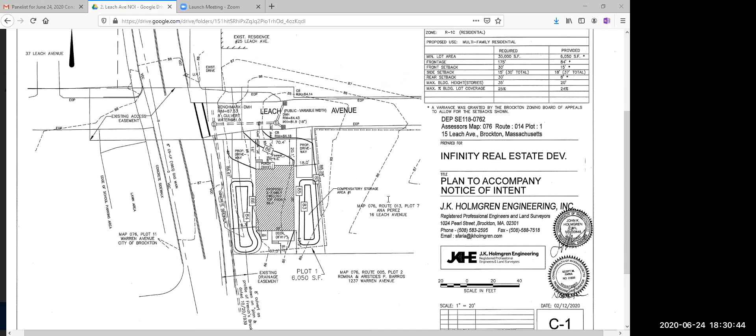Okay, can you see the screen? Yes. All right, because I don't see your name on the abutters identified. It's Perez. Oh, it's Perez. Okay, correct, so you folks are over - I just saw you, you're over here. You're immediately adjacent to him, that's attached to him, and that's his property there that he has.

And my neighbor to the left of me also, his yard turns into a river as well.

Again, Madam Chair, if you look at the plan, their property that abuts us, they have a good sized side yard, a grass area, and they're about 3 feet up grade of us. So that whole end of Leach Ave does flow downhill to the two catch basins in front of our property. Those are at a low spot.

Where is the drain discharging to? Right in front of his property, on both sides, right there where your cursor is, Madam Chair. That's where it drains to - that's the manhole. And then it discharges to French Brook, the culvert. From here is French Brook? Yes, it runs in a southerly direction, north-south.

So it's a big, 8-foot culvert. It's a major drainage structure, not a 12-inch pipe. It's a big structure they put underground to reroute the brook. But if it's surcharging, it sounds like it's not sized properly. The catch basins in front of our site may not be sized properly, but the culvert itself, again, it's an 8-foot culvert, as big as most of your rivers in the city. So I'm sure the culvert is fine. It's the catch basins in front of the site that are 12-inch pipes. There's only so much water they can handle at one point.

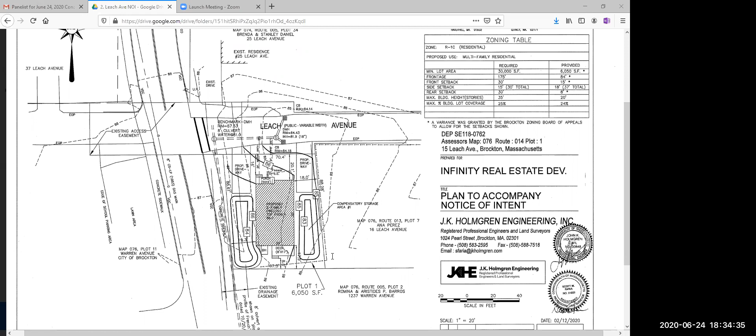So I basically abut the property, I'm not sure, to the rear most likely of the property. I'm not sure of the actual direction of it. The water comes in off of Leach Ave and actually pours in over the rear of my property. The grassy area alone is about 200 feet in length. A week or two ago we had some heavy rain that basically flooded out my entire backyard, a 10,000 square foot area, to give you an idea of how much water goes through there. Usually when it happens in early spring or something, the ground could still be frozen, and that water can stay back there for over a week because it has nowhere to go.

Not only that, but my backyard runs into the other empty lot - the undeveloped lot on the other side - and it runs into there as well. I've been here about 13 years. I remember my neighbor Perez, their entire basement flooded years ago. I don't know if the elevation was changed at all with the foundation being laid in, but I'm pretty sure it didn't improve any of the conditions that already existed.

And again, if any of my fellow commissioners want to speak, just speak up, I can't see you so I don't know if you're dying to ask a question or not. I have a question, this is Bonnie. I am curious more of how it would play out if we were to engage with the idea of no basement or a reduced basement. That sounds like something the city engineer was recommending. Yes, that was his recommendation. Again, this was related more to the integrity of the house rather than the easement.

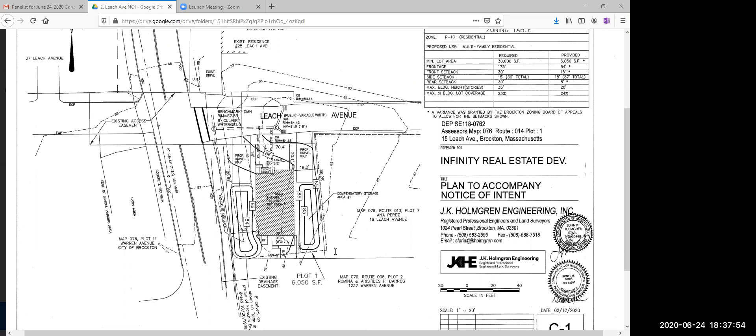I mean, are you raising the elevations overall? Yeah, we're pretty much keeping it - we've got top of foundation at 89, grade around the foundation at 86, and the existing grade on the lot is between 85 and 86 depending on where you are. So the proposed grading is pretty much the existing grading, not a great change. So what is the fill being brought in for? And I still need an answer to my question about the depth to groundwater. The fill is just being brought in to mound around the foundation, so we can properly pitch away from it. That's it, it's just 100 cubic yards, not a giant amount - it's really just to properly grade away from the foundation.

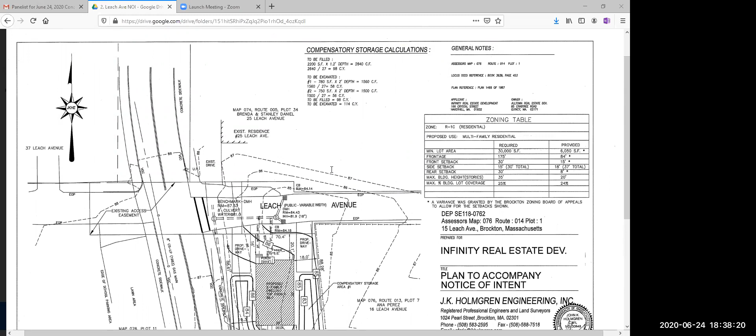As far as groundwater, we didn't do a test pit to look at it. We don't typically. The top of foundation is at 89, which would put your basement at 81.5. The lowest spot on the lot is about 85. I'm sure we don't have a groundwater issue out there, but we could certainly dig a hole to prove that. As far as not having a basement on the property, I don't know that there's really a reason to justify that. It's not in the floodplain and it's not in the groundwater.

But we don't know what the groundwater is. To be honest, if I went out there tomorrow and dug a hole and found that the groundwater was at 83, we would just bump the foundation up, look to raise it somehow that way. As far as the city engineer is concerned about the bottom of the basin being at 83 and the basement being at 82, we could just put a poly barrier up against the foundation to make sure the water didn't go into the basement, if that was an issue.

Okay, so if I heard Megan correctly, the city engineer would like some time to evaluate the compensatory storage that's being proposed. So I can read his recommendation here on behalf of the engineering department. It says, 'It is our recommendation that the Conservation Commission should suggest to the project proponent to request an extension so the above issues are first addressed and reviewed by the Division of Engineering of the Department of Public Works.'

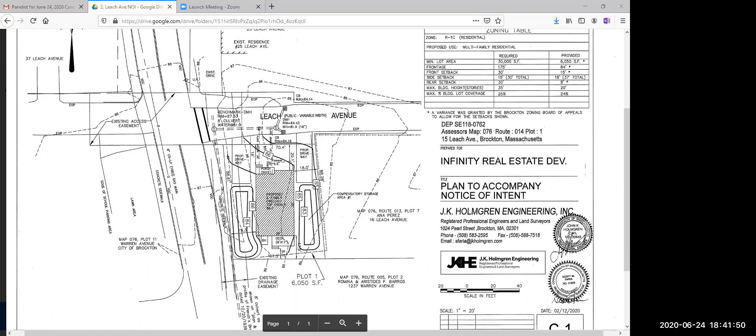So do you want to continue? Yes, please. If I could see the city engineer's letter, we'll do our best. It's not easy. We've been waiting for a response for a few weeks on this one. Unfortunately, if it just got there today, that doesn't help us much. But if we can get a continuance, we'll do our best to get some conversation going with the city engineer and come up with a solution that satisfies everybody. It just isn't easy doing it. And our next meeting is the 15th.

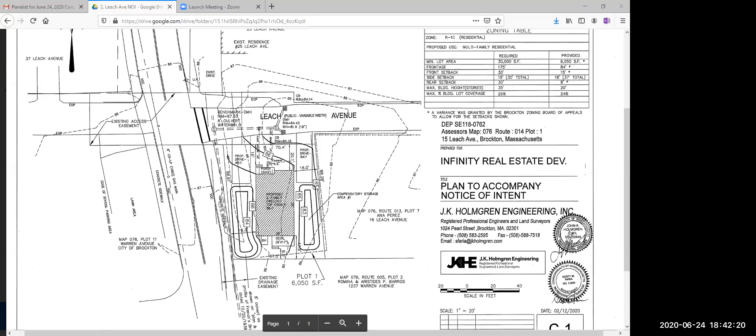So do I have a motion to continue to July 15th? I make a motion to continue to July 15th. That's Joanne. Do I have a second? I second. Bonnie? Danielson, aye. Joanne, aye. Bonnie? Aye. Okay, so we'll see you back on July 15th. Thank you, folks, have a good night.

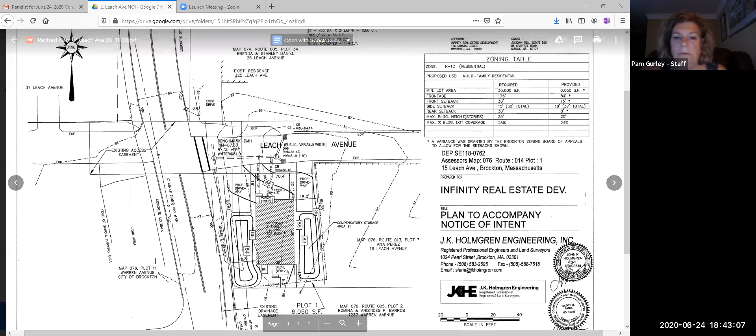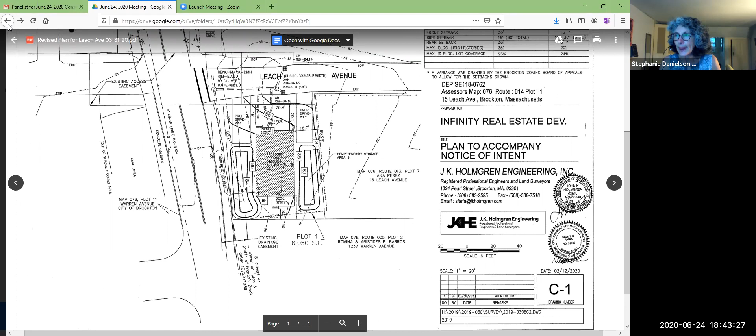Pam, can you hear me? We can. Okay, thank you.

And is this the project that's identified as Zero Quincy Street? Yes. I was planning on recusing myself from this project. Madam Chair, this is Antonio, yes, the project engineer for this project.

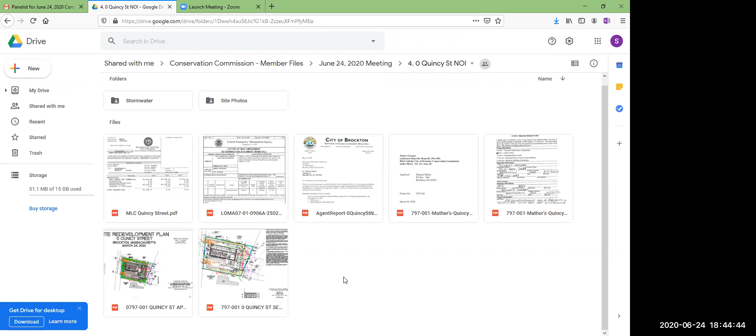I believe, Madam Chair, that you only have three members of your commission present. That's correct. And I also therefore believe under the open meeting law and notice of disclosure, I believe that you are allowed, Madam Chair, under the rule of necessity to be present. You may not necessarily vote on it, but when you are participating under the rule of necessity, it's important for us to have a quorum. I have what could be perceived as a conflict, and I was going to ask you, again, in the interest of quorum and not continuing this, because we've already waited quite a while to get to this meeting.

I will make a disclosure. I was notified by my manager at work that there may be a work-related conflict for me, but personally, I think I can act in a very objective manner.

And if it's just to keep the quorum for tonight, then at the next meeting, if we have a full board, I may recuse myself at that point.

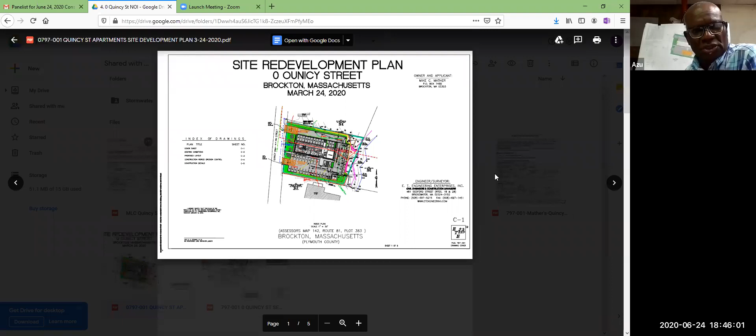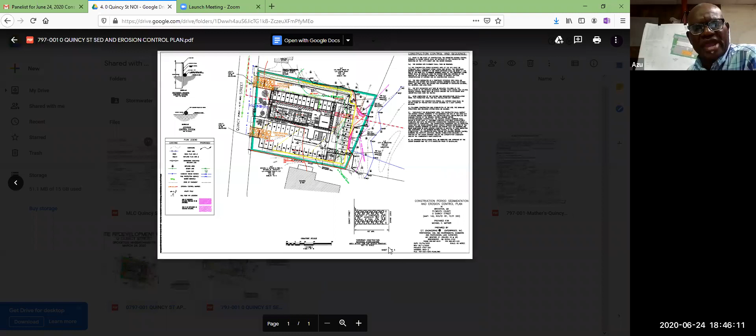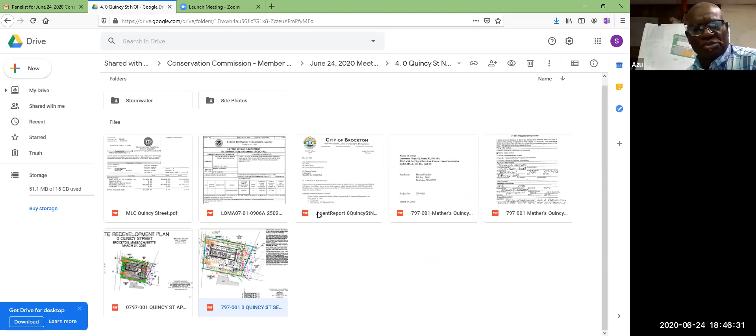Madam Chair, I think I've worked with your commission for a very long time, and I believe I'm not speaking out of turn if I say that you're very fair and knowledgeable in what we are doing. We believe you will be impartial and give us a fair hearing and a fair action if we're able to convince the commission that we have done our due diligence. So we will not have any problem with your participation, Madam Chair.

Okay. As counsel for the applicant, I would agree with you. Okay, let's proceed.

Good evening. For the record, my name is Azrael Taniru. I've put up a board behind me to hide the clutter in my office, but I'll also use it for discussion purposes. I'm an engineer, but not too savvy with computers and sharing files, so I'll use the plan you have, as well as my background poster, for additional conversation. This project is located near the intersection of

Quincy Street and Crescent Street, being Route 27. It is across the street from Massasoit Community College, which I believe is the former Christos restaurant site.

What we have here before you is a classic redevelopment project. In other words, the property was previously developed. It is approximately 85% currently a parking lot with bituminous concrete pavement as its surface.

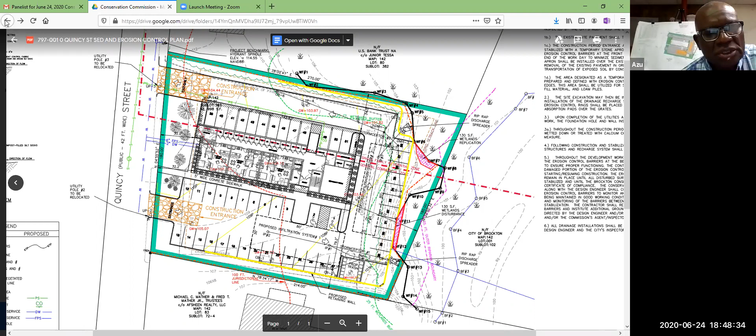Mr. Kenneth Thompson, our consulting wetlands biologist, delineated the resources, which include a riverfront. In Brockton, the riverfront area is 25 feet from the mean annual high water, and also a BVW, bordering vegetated wetlands, which pretty much tracks the edge of the existing pavement.

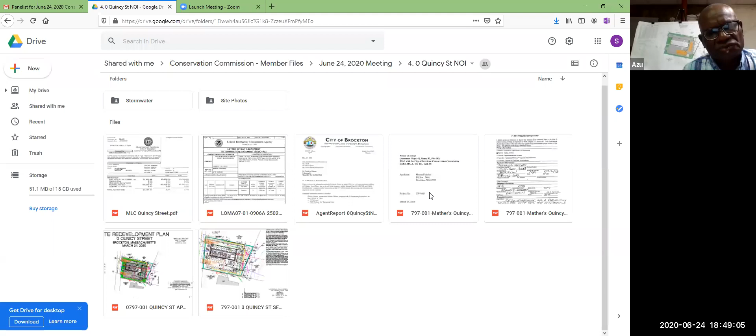What we have before you is a redevelopment project for assisted/elderly housing use, which means taking away a good portion of the impervious bituminous concrete surface and replacing that with a building, which reduces the potential for contaminants.

We've also performed, even though it's a redevelopment project, stormwater analysis, evaluating the pre-development and post-development conditions, which in reality is a wash.

However, being good stewards and aware of your environmental concerns, we are providing treatment for the impervious area, including the roof drain runoff. We are providing on-site recharge based on the DEP stormwater guidelines.

The site is flagged, designated as a floodplain. We did our calculations and have an actual elevation established for this site. FEMA, after evaluating our calculations, accepted the flood elevation that we've come up with.

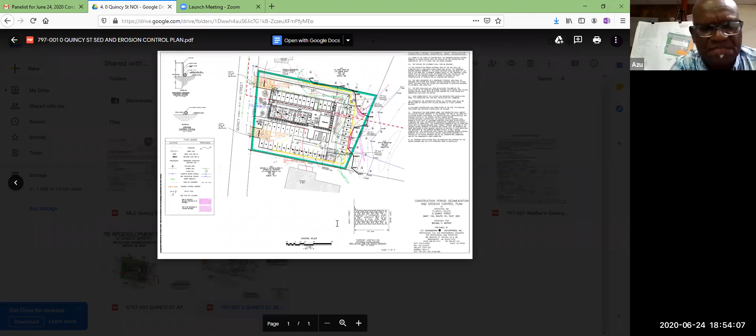Whereas the area of development is actually a redevelopment under the DEP stormwater guidelines, standard 7 is really what is applicable here. That standard basically says that for redevelopment, especially in-kind redevelopment, where we're taking an impervious asphalt area that we're going to be treating, we can, as long as to the maximum extent practical or feasible, that's the level of compliance that we need to achieve.

However, trying to be good neighbors and good stewards, we are reducing the rate of runoff. I will go quickly in a minute through the comments from Ms. Shave, as well as the comments from your review consultants, Beta Group.

I will say this: the original delineation of the BVW was done in 2018. It's taken this while to come up with a development plan that will work for the site, as well as meet our client's objectives.

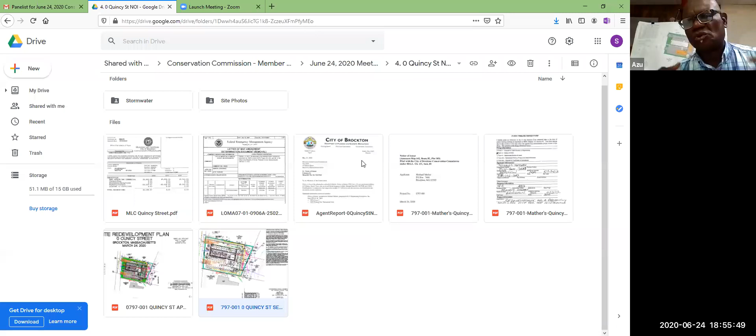In reviewing the comment from Ms. Shave, we have gone out, because the wetland delineation was done based on the criteria established by DEP. What we have done then, because we collected those flags, the delineation flags, by survey on the ground, I'm the licensed surveyor responsible for that.

We have since, receiving the comments from Ms. Shave, reestablished the flag locations. So those flag locations are there on the property.

To the north, along the northerly boundary of the project area, Madam Chair, members of the commission, we have almost like a finger-like projection of the BVW, and most of that BVW then traverses in a northeasterly direction on the abutting property. So we didn't feel it was proper for us to continue beyond our immediate area into somebody else's property without their permission.

One of the items important for us: we understand you have a policy of requiring a 25-foot no-touch boundary from BVW. Because this site is previously developed, we are not able to achieve that setback.

Also, in order to make our drainage work properly, we have approximately 130 square feet of BVW alteration to allow for a positive discharge, actually in consideration also of the comments from your peer review consultant, Beta Group. We have actually realigned the discharge so that we have proper positive discharge and have updated our calculations.

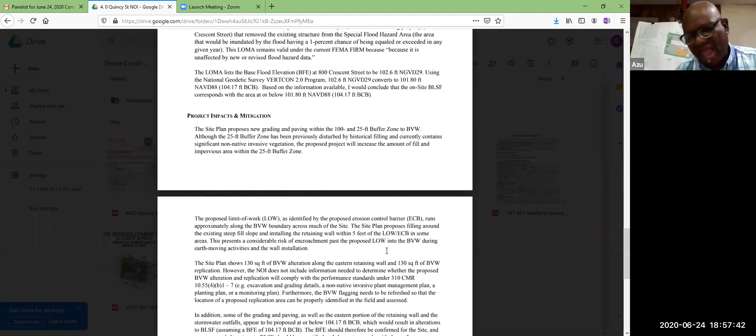We will share that with them and Ms. Shave. So we would welcome, at the earliest possible convenience, Ms. Shave's revisit of the site to review the delineation, because if she has any problems with the delineation, it might affect what we're doing.

So we would like that to be resolved with our biologist if there are any issues, because there are specific areas Ms. Shave identified that she questioned. So we would like an opportunity for that to be reviewed and addressed.

Again, we are providing treatment, and I have a written set of responses that I will share with the commission and their consultant. At this point in time, that was a week ago, that the review report we received from Beta is dated June 15th, so exactly a week ago.

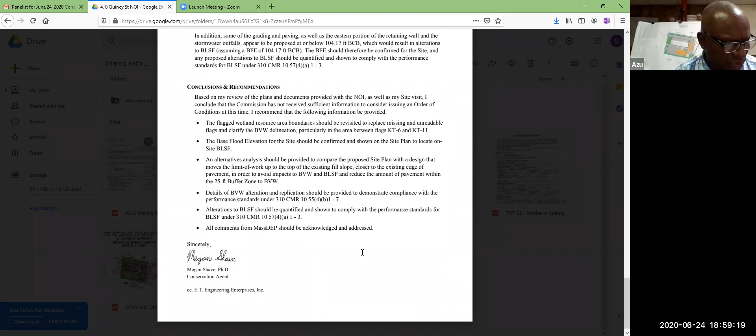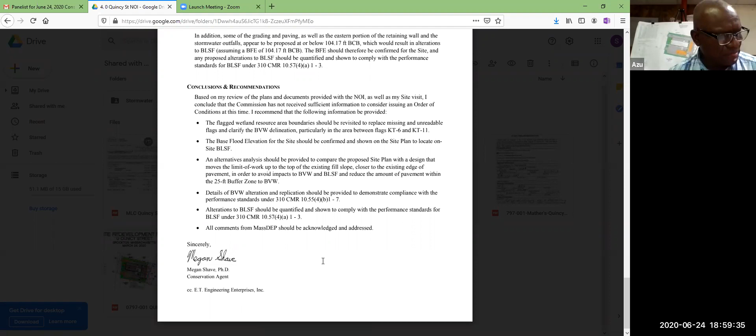And obviously they did a detailed review, as well as Ms. Shave's review. I have articulated some responses, and in the interest of managing my time and perhaps the commission's time, whereas Ms. Shave will need to go and look at the flagging we've hung up, and whereas we believe some of the comments, we would like to discuss that with your peer review consultant so that we are not going back and forth, so that they can understand the rationale for what we've done.

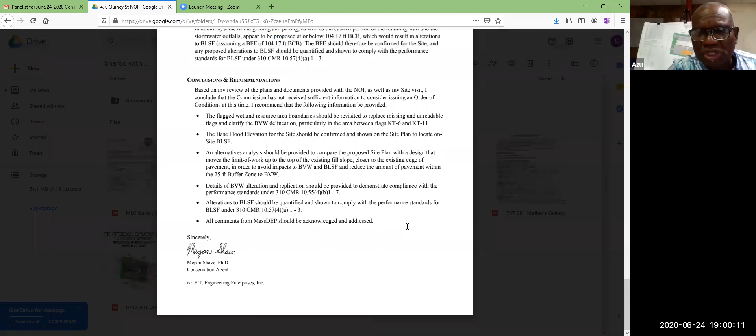Again, I think we are 99% in line with the DEP regulations, but I guess we need to make sure that we convince your consultants on that. I have my review of responses that I would like to email to you as well as your consultant, and then have an opportunity to discuss it with them, perhaps virtually, and then meet with Ms. Shave on site, and then we can have a productive meeting and hopefully get a positive conclusion with the commission. With that in mind, I would entertain any comments or questions at this time, Madam Chair. Thank you.

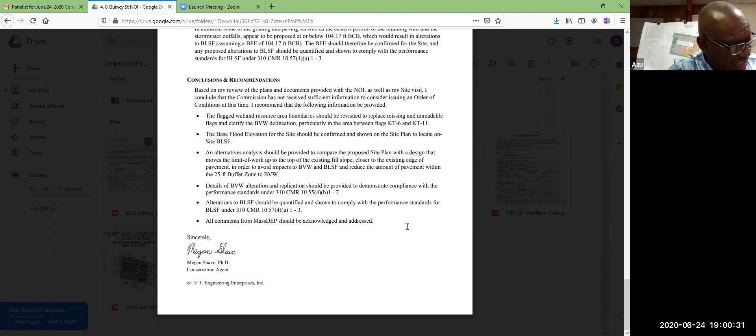Megan, you have a few comments in your letter. Do you want to review those, please? Sure. So Azu has touched on some of them, so I can just reiterate and run through them.

Yes, I did recommend that the wetlands flags be revisited. They were hung in December of 2017. So while technically that falls within the 3-year period of validity, when I went out there, I did find that a few flags were missing and most of the flags were no longer readable, which made it a bit difficult for me to determine the delineation in some places. Particularly between flags 6 and 11, I had some questions about the shape of the fill slope and how that influences the surrounding BVW. But at the time, it was hard to determine because flags were missing. So that is something I can follow up on now that the flags have been reintroduced.

I also had a comment about the base flood elevation. This is another Zone A area for Beaver Brook. At the time that this was filed, there wasn't a base flood elevation provided. It sounds like Azu has since pursued a letter of map amendment with a base flood elevation. So receiving that, we should be able to review that and see how it falls on the site based on what they're proposing.

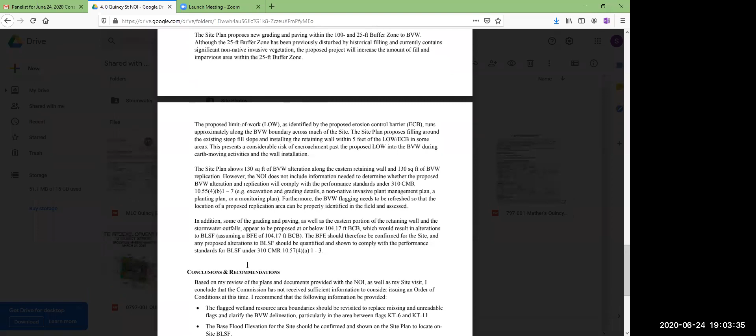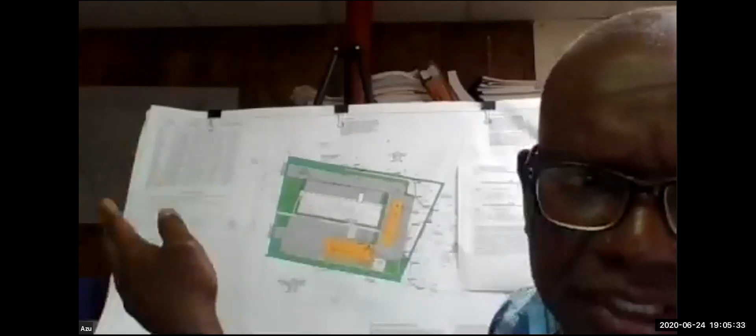I would respond by saying those are actually reasoned and fair comments and questions. And I believe that, yes, unfortunately, what happens a lot of times with these projects is that as they evolve, you end up seeing what we've come up with. But I will submit to the commission that we did go to the Board of Appeals. So this is a compromise of a project that what we were looking for was reduced by more than 25% in order to get the variance that we were looking for.

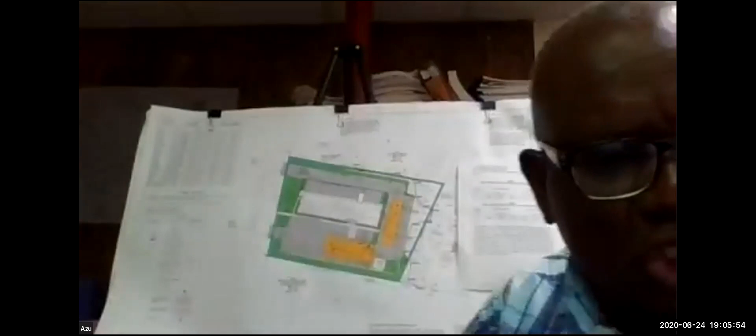So before you go on, is that 25% of the area you're building, or 25% of the number of units? Well, the number of units, because when you think about that, it also reduces our parking requirement more than you ordinarily would have. And they were not inclined to give a variance for parking, because that would mean parking on the street, which is not allowed. So yes, in terms of the number of units.

What I believe, Madam Chair and members of the commission, is yes and yes. You've got situations that are comparable. However, what we've done, if you look at the easterly end of our project, water flows downhill. So that recharge area, keep in mind that presently you've got runoff from a parking area that is untreated and not recharged, and that will continue without this project. So what we are doing here is being good and sensitive to the concerns historically, having worked in this city a long time, trying to strike a balance between those concerns, in an attempt to demonstrate that we have not just come up with a cavalier project.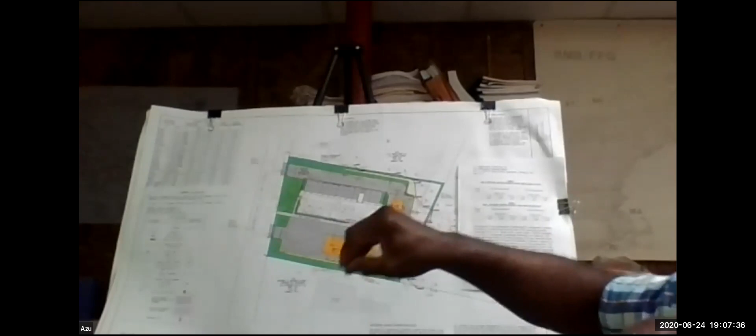Because water runoff does not flow uphill, the site slopes from Quincy Street towards the wetlands. So what we've done in order to provide stormwater recharge and treatment, if you look at where it says proposed infiltration on the east side, I have to do that grading work, so that is some sort of a trade-off. In order to provide that recharge, I have to work within that buffer zone. So I believe it is a fair compromise, that we are actually trying to reduce the untreated runoff from going directly into the BVW, as well as providing recharge to the groundwater.

This will not be your typical single family residential project. This will be a very managed project all along that easterly boundary to make sure there's no activity going beyond that. We're proposing a retaining structure, and we can perhaps do a few more plantings to provide additional vegetation along that boundary. But if you look at the property to the south, to the north, and to the west, we are providing a lot of new green area that does not exist presently.

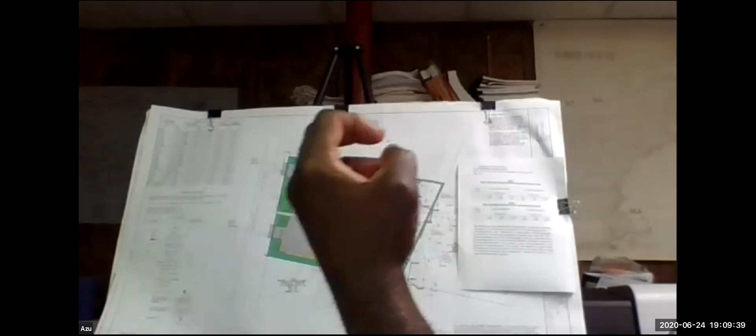So while I'm an engineer representing the interests of my client, we have actually done our due diligence in anticipating potential concerns and issues and being proactive in addressing those. Of course, there are a couple of comments from your peer review consultants as well as Ms. Shave. I believe we have addressed them, but we need to meet with Ms. Shave on the property to make sure she's in agreement with the wetlands line, and then hopefully we will be able to wrap up the project at your next hearing.

If Mr. Mather is online, you can chime in. I believe you've got our commitment to start off because of scheduling, and with all the delays, through no particular person's fault, we would like to meet his construction schedule. This was supposed to go to construction end of May, but we are where we are, and Mr. Mather is hoping to start construction now so that he can still keep the financing he has for the project. So we are looking to start construction end of July.

Has this received site plan approval? I don't believe this has gone through that yet. We've had one meeting with the design review people, and we will meet with them again. So the conservation process is the most critical at this point for what we're doing, and we want to make sure we've achieved that.

You cannot proceed to the planning board without that order of conditions. That is correct, that's why we're here. But I honestly don't remember it going through tech review, so I'll have to go back — I know we had a meeting with the applicants and the attorney, but I don't remember it going through tech review. I'll check the records.

You folks can work that out. If I can jump in here, this has been looked at by the planning department, also on the executive side of the city of Brockton. And I think there's a lot of favor for this project, especially since it's a fairly unsightly location, or a site that needs to be improved upon.

And the city councilors are very in favor of this. And it went through the zoning board of appeals process. We've done quite a bit of vetting with various departments, including the executive branch. And there are many people in favor of this project. Pam, I tend to agree with you.

I'm a little not too sure. I don't think we've done the site plan approval process. I don't think so. We may have filed, and this COVID thing has got me in a COVID coma, quite frankly. I can check tomorrow morning when I'm in the office. I've missed what's happened in the past few months. So if we could, you folks can work that out.

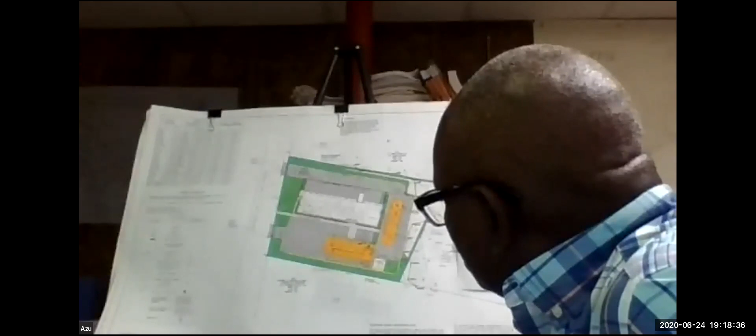The trash removal area, yes. The top right of where you're pointing, that is abutting the 25-foot line. Well, that is 33 feet from the BVW.

Right, but it's very close, and that's my concern. Yeah, it is close. But I just want to make sure that at least we know it's not in the 25 feet.

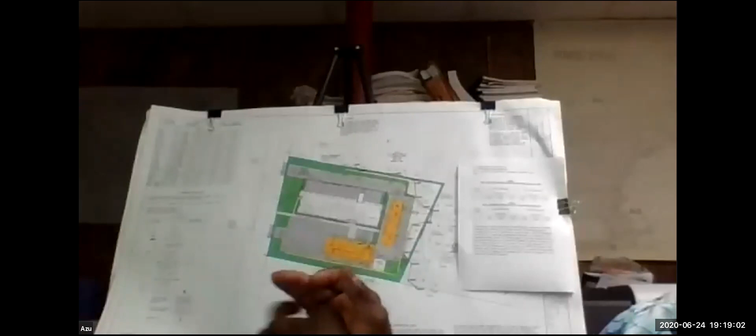It's definitely not. In terms of snow removal, because this will have actual management by a company, most of the snow will be on the green area on the west side of the property. Any excess snow will be hauled off site, since you need to do that to provide the parking. So snow management will not be a problem.

As a matter of fact, it's good practice not to use salt in these areas, and we will not have any problem. We will not be adverse to the commission imposing a condition in perpetuity of no salt for de-icing. That's not something we would be adverse to.

Okay. Bonnie? I believe Joanne has asked all my questions. Okay.

So there's still a lot of work to do. Yes, Madam Chair, we're not looking to close the hearing tonight. Do you want to continue to the 15th? Of July, please.

And in the meantime, we would reach out to Ms. Shave to see when she might be able to meet on site. And Ms. Shave, we do maintain our social distancing, and we do have our masks on every time we go out.

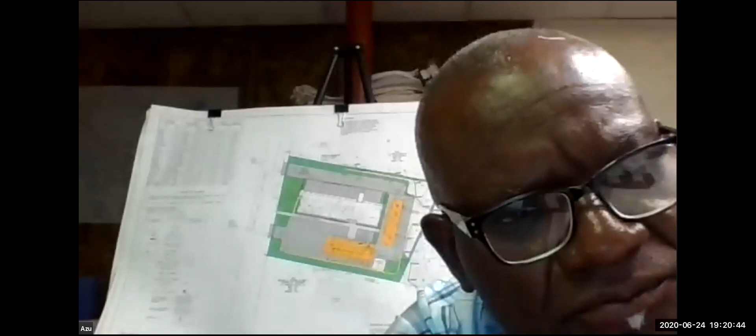I just have one question, more of a comment. Again, Attorney McCluskey was talking about having conversations with the councilors and with the executive level of the city. I would also encourage people looking at projects like this to reach out to Megan ahead of time and have a conversation with her and review the project, because she can certainly help guide you in a direction that will make it easier and facilitate the review process with the Conservation Commission.

I've loomed over Megan's desk a couple of times on this. Okay, already. All right, that's what I like to hear. I like to know that people are reaching out and talking. She is, unfortunately, too close to the front line and has no escape.

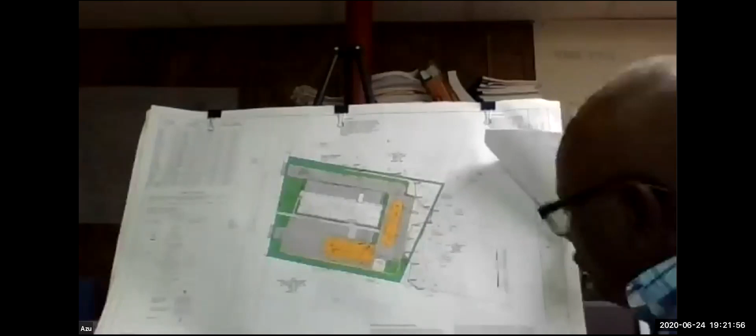Yeah, okay, and then just one other comment. I couldn't find it before and I still can't find it. I'm looking at sheet 4. Is there a north arrow on your plan, Azu? Yes, if you look at sheet number 3. Okay, but sheet number 4 does not have one. Okay.

I don't have my sheet 4 in front of me. Can you share that? Are you able to share sheet number 4? Hold on. Okay.

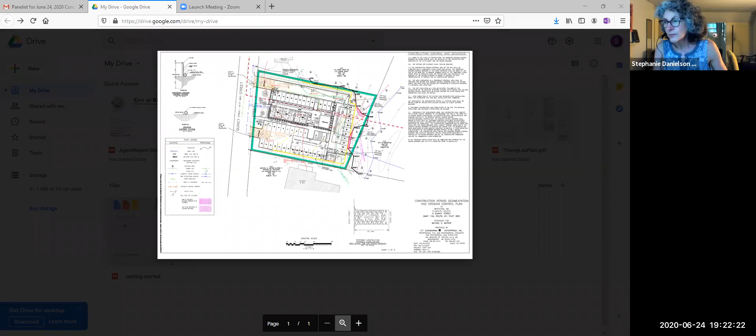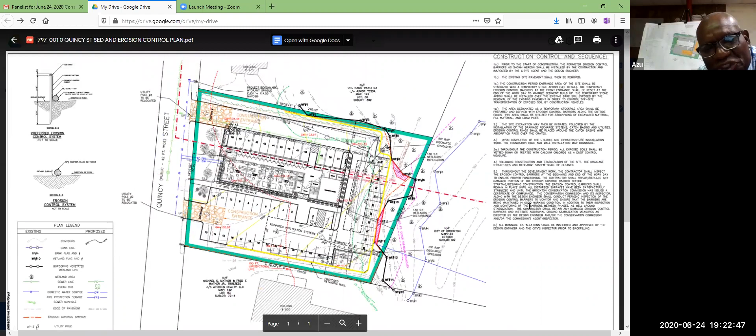Now, the reason it doesn't have it, we can add that, but the reason it had it before—if you look at sheet number 4, it's actually a reproduction of sheet number 3, with all the specifications for the construction period. It took the space where we had it, and we could have moved it over to the left side, but we didn't move it or put it back on the plan. Those notes go there—that's really what happened.

All right, okay, so do I have a motion to continue to July 15th? I'll make a motion to continue to July 15th. That's Joanne. Do I have a second? I will second. All in favor: Stephanie, I. Joanne, I. Bonnie, I. Okay, thank you.

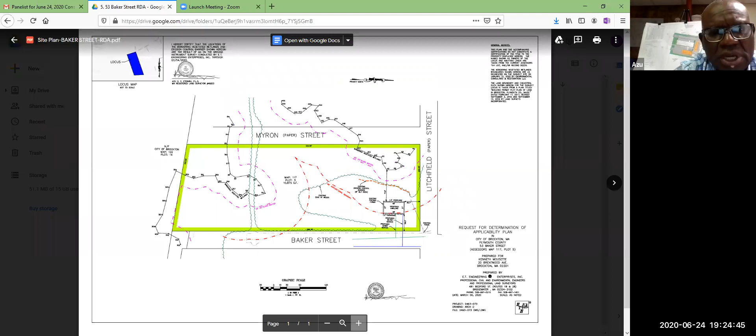There was a confusion as to what Mr. Mousette should have done, but I don't know, to be honest, the history of Mr. Mousette with the commission. However, he did receive an enforcement order, a cease and desist order, telling him he shouldn't do any more work because he has wetlands on the property. The BVW was never delineated.

He apologized and assured me that he had received a building permit and that there was a sign off from the commission's office on the building permit. At that time he didn't know he had to go to conservation. When he received the cease and desist order, that was probably in order because commission staff can only react to a plan before it, and if that plan did not show any BVW, it's incumbent upon the applicant to reflect that. That was not reflected on any documents that were signed off.

So he stopped work. That was back in late January, early February. He hired Mr. Brad Holmes to go flag the wetlands, which he did, and provided a report. Then I went out there with a couple of people from my office and located the wetlands. The foundation is already started—he put the footing on, the foundation is there. The foundation wall was ready to be poured when he got the stop work order, which I encouraged and admonished him to honor, and he has done that.

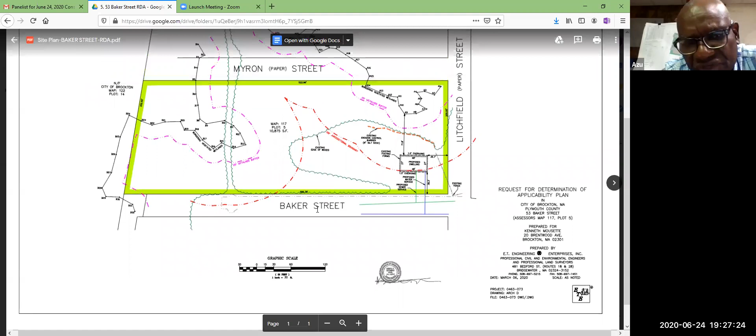With the advent of COVID-19, I told him, let's file a request for determination, which is what we have here, now that he has the wetlands delineated. We are asking the commission, and hoping and praying, that he can maintain that 25-foot no touch. You can see the clearing that's done, this squiggly line representing the limit of clearing, is still above the 25-foot no touch. The actual foundation work is well above 70 feet from the BVW.

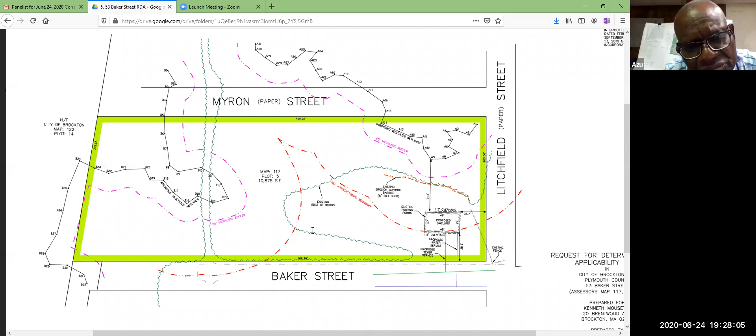I received Megan's comments, and those are properly founded. The problem now, with the negative determination, is the stipulation about not even providing erosion control. Let me back up, Madam Chair—when he was ordered to stop work, he went on and put erosion control barrier right away.

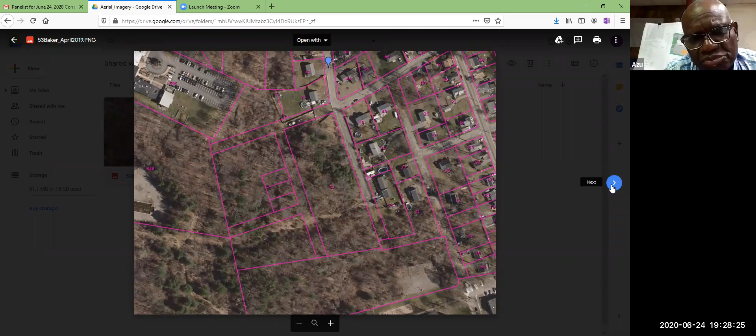I saw the comments from Megan, and those are properly founded, but I also recognize that it's now almost 4 months, and requiring an additional application to go through a notice of intent will really put an undue burden on Mr. Mousette. At least since my involvement, he has determined and committed to whatever needs to happen that he will do. So while I agree with Megan's comments, I think because of the delays we've had—if we'd been able to have a meeting back in March or April, we'd have probably had a hearing on the notice of intent in May. But here we are at the end of June.

So Azu, I'm going to stop you there. The whole world has stopped, and there's been significant adverse impact on a lot of people as a result of COVID-19. We are in the situation we are in, as you pointed out, through no fault of any of ours, and I think belaboring that is not productive.

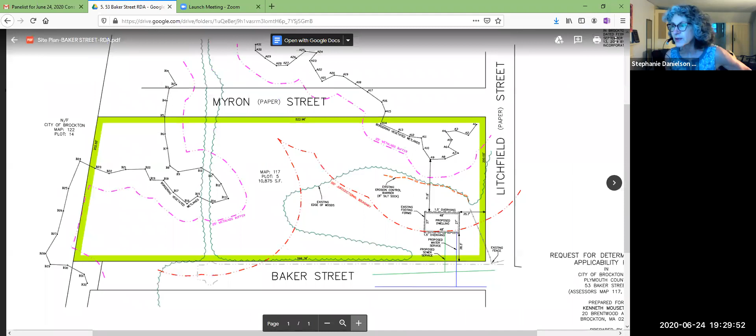I'm looking at the plans, and I see one plan sheet. Am I missing something? No, Madam Chair, you're not missing anything. I don't really see where—okay, so the footing, okay, there it is. And Megan references something from 2002 in her report.

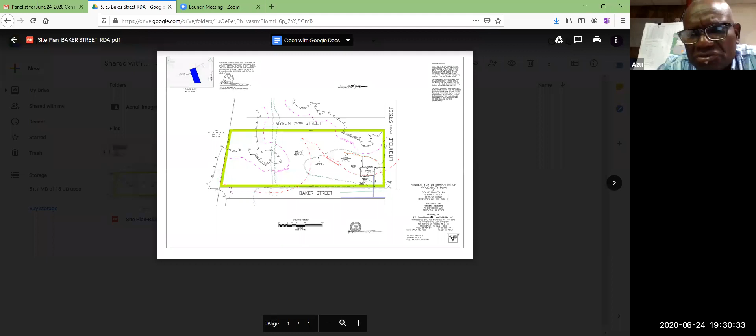It has a long history, right. I'm not sure why Mr. Mousette did not know he was subject, or could be subject, to a filing with the Conservation Commission. Sometimes it's—as I noted earlier, Madam Chair, I cannot speak to the counsel he got from somebody else prior to my involvement. But again, there's been some history here, so I'm confused as to why this is being submitted as a determination when the proposed dwelling is clearly within the 100-foot buffer.

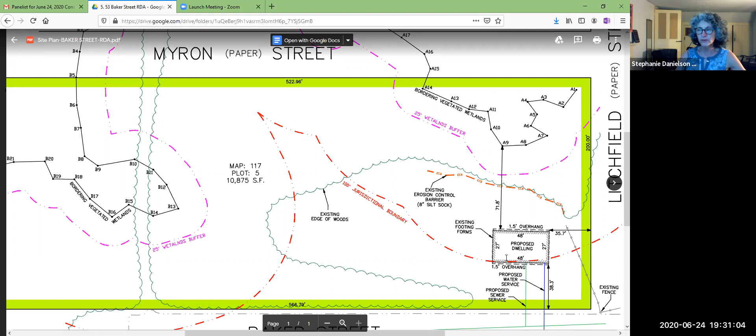The only reason I did that, Madam Chair, is looking at the DEP policy that when work is more than 50 feet, our request for determination can be considered on that basis—that's the only reason. And I'm looking at the foundation that it's 70-something feet away.

That's the only reason, no other technical reason, other than the fact that DEP policy allows a request for determination for when you can stay 50 feet. I think that can readily be accomplished here.

I agree with Megan's comments that perhaps, as a good faith gesture, if we can be allowed to not do any other site work, but at least frame the building. We're still going to do utilities, we still have to do landscaping work, and the foundation is already there.

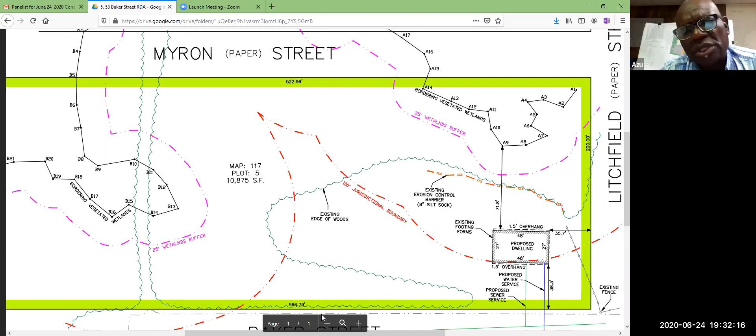We don't have to do any ground disturbance to build above. If we can do that while we do a notice of intent for the site work, perhaps that will mitigate some of the hardship. I'm not saying he's entitled to any special consideration, but I think...

So again, I'm not inclined. Megan, please remind me, does a determination of applicability need to be recorded at the Registry of Deeds? No, I don't believe so, but if you make a determination requiring that, it can be. I would rather see this go through a notice of intent myself.

And especially given some of the history here. Joanne, do you have any comments, questions? No, not at this time, I think I agree with you on that. Bonnie? I'm also interested in seeing it as a notice of intent.

Would you like us to take a vote tonight? Madam Chair, is it possible, if obviously a notice of intent means a positive determination, which I would not have a problem with. But is it possible, Madam Chair, if the commission will -- Ms. Shave obviously is familiar with the site.

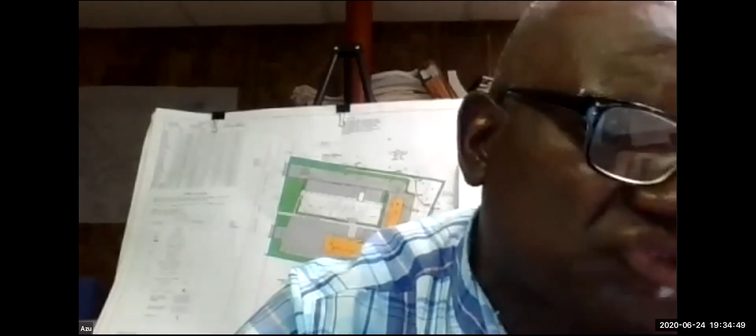I think that will mitigate some of that hardship. It is self-imposed hardship, I agree. It is self-imposed hardship, but at the end of the day, if there is no sin, we wouldn't have the word forgiveness. So I'm just asking the commission to have that little empathy, if you will.

Fellow commissioners? I'm sorry, I have no empathy here. The rules are the rules, and those weren't followed here for a very long time, it appears. So I think it should follow the proper process, and for us to permit any kind of framing without the proper process being followed, I think is really unfair on any future project that might come forward.

Bonnie? I have to agree with Joanne here, so my fellow commissioners are echoing my sentiments as well. I really would like -- we need to see an order of conditions on record for this project. So you're asking the commission to make a determination. Do I have a motion to issue a positive determination?

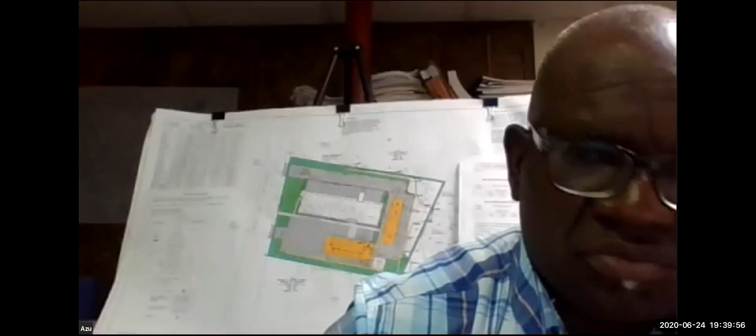All right, we have some other business. Oh, I didn't ask if we had any abutters. It's a determination, not a hearing, correct. And nobody raised their hand. Right, right. Okay.

Megan, the floor is yours. Okay, so we have two requests for a minor change. I can start with the new one since it hasn't been discussed. This is for the VA hospital and their existing order of conditions. He is online, so I'm going to unmute him.

Okay, yeah, and then Monica. Okay, so yes, I've met with the project engineers on site. Basically, they have an existing order of conditions to finish developing their staging area, and they're looking to— okay, I'm going to stop you for a moment.

Mr. Hughes, are you near a radio or a cell phone that's causing that feedback? I might be, yes. Could you take care of that for us? It sounds like the feedback might be from that; you might need to put in headphones, it might alleviate the problem. And in the meantime you can mute yourself, and then if you need to speak, you can unmute. Okay, better? Every time you talk, we get the echo. Hold on, Megan, do you want to?

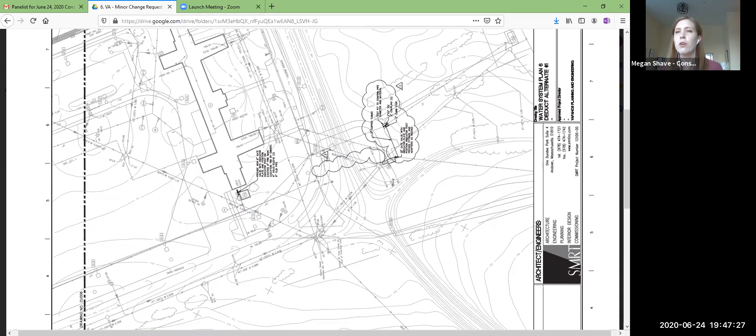So they're proposing where that little arrow's pointing, that's the connection from the existing water line to the pump house. And then is this a new line here?

Just a call out. I think it's just a line pointing to their labels. Okay.

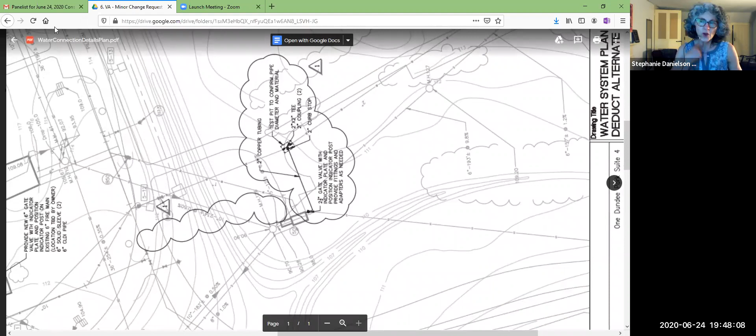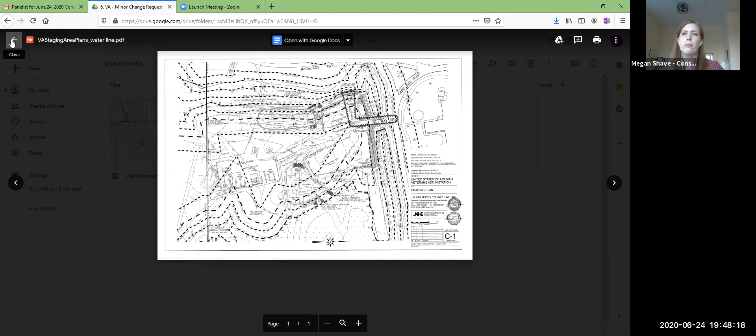All right, and it's your recommendation that we accept this as a change? Yes, I mean, the area isn't paved yet, so they wouldn't have to dig up any paving. It would just be, I think they're looking to put it in before they do the paving associated with the staging area. Okay, all right, do I have a motion to accept this change?

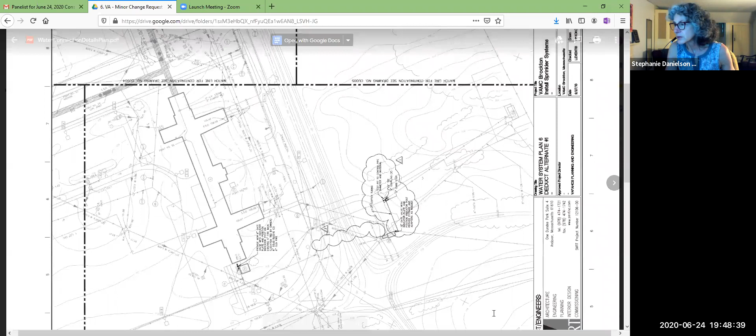Is this a new plan sheet or is it an amended plan sheet to the plan set? This is a separate sheet. Okay.

So I think the motion is that we want to accept the plan as shown on this plan sheet, which appears to be titled Water System Plan 6, deduct alternate number 1. And I'm looking, it's dated, it looks like 2/27. I don't think I can zoom in anymore. There we go. This plan is dated 2013.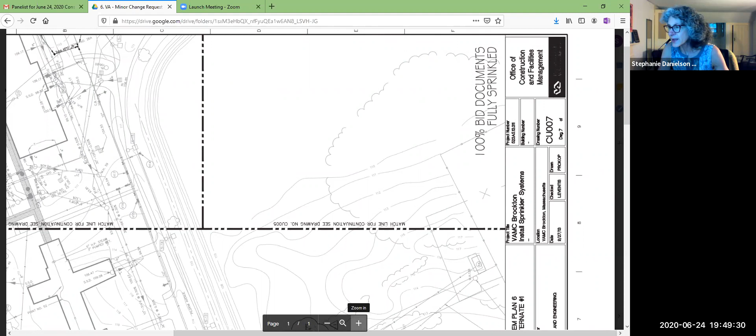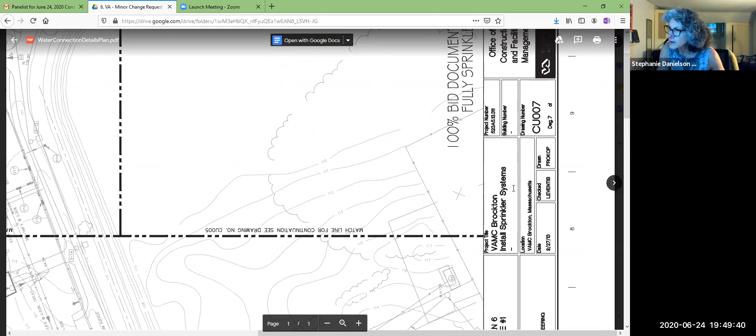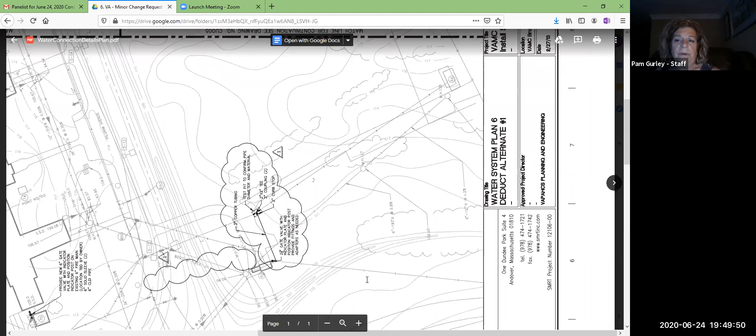Is there a revised date? I don't see a revised date. Is that not on the original order of conditions plan? No, the connection is not on the original order of conditions plan. So they just didn't revise the date? They didn't revise the date.

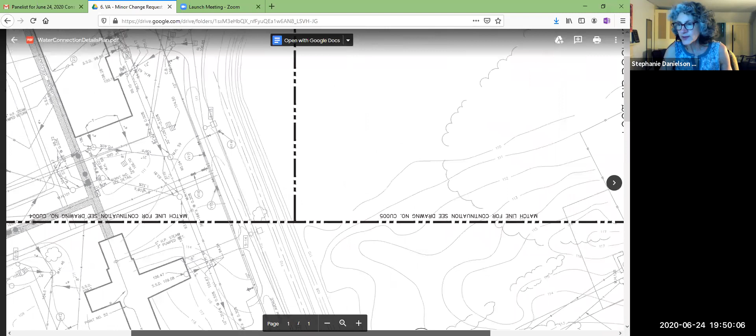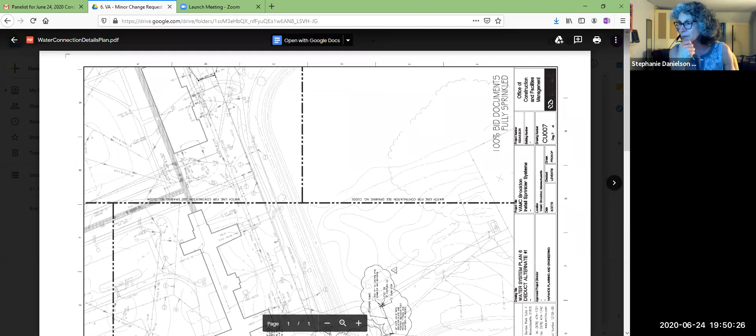Does this, it doesn't, we don't have a date stamp on this either. No, I believe the other plan done by Holmgren, they did the original plan, so they also added. Yeah, I mean, we really should have a current plan, at least with the, is that the revision date there?

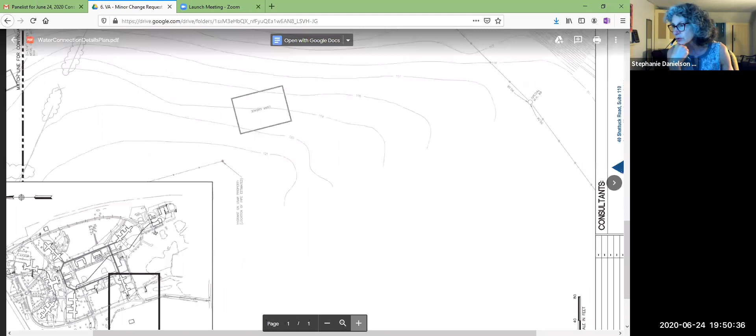So there is also in that folder. There we go, oh, there it is. 4/2/20. So it is revised through April 2nd, 2020.

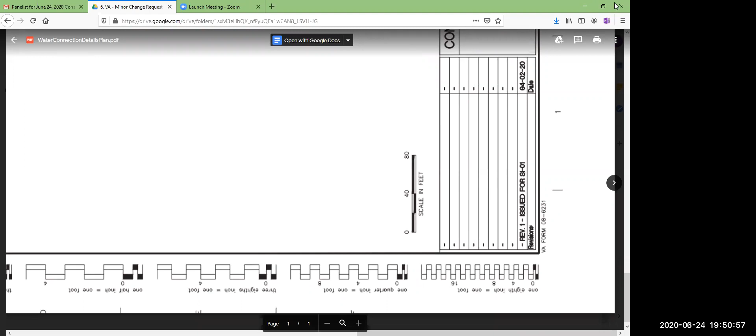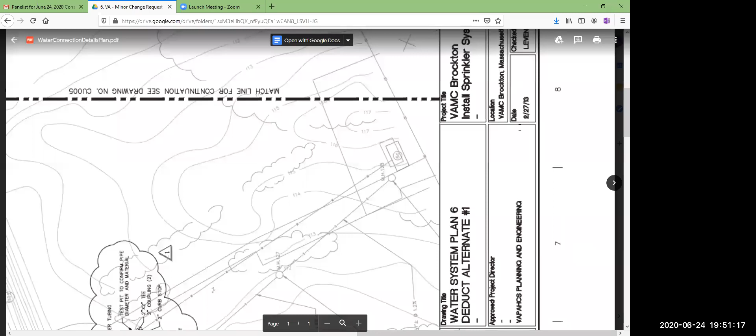Do I have a motion? Yes, but you'll have to scroll back up so I can read the name of the plan. You need me to do that? Yes, right here. Okay, so I make a motion to approve the minor alteration as shown on the Water System Plan 6, deduct alternate number 1, dated 2/27/13 and revised 4/2/2020. Do I have a second?

I second. All in favor? Aye, Stephanie. Joanne, aye. Bonnie, aye. Okay.

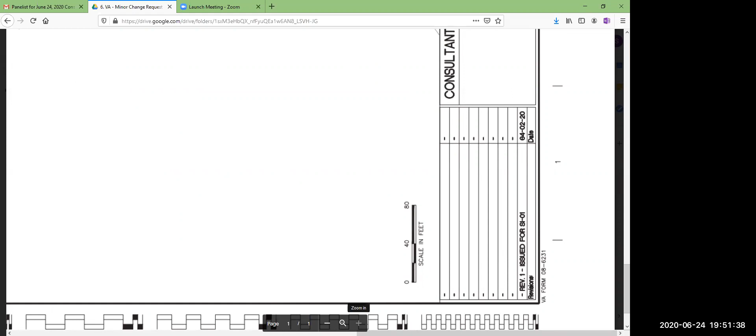Then 2020 Main Street. Didn't we do this last week? Oh, we had no quorum. We had lost the quorum.

Oh, all right. I'm going to make a motion that we accept the request for minor change, which is to not level out, right? They trenched it. Did not trench it. They did not trench the replication area. Do I have a second?

A second. Stephanie, yay. Joanne, yay. Bonnie, yay. Motion passes. Is there a date on that plan?

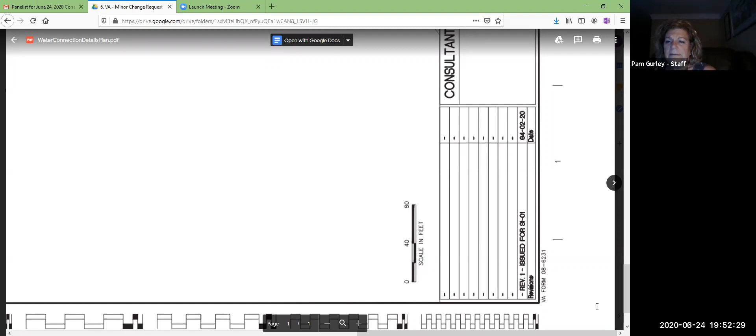Just changing 2020, hold on. Can you tell I've been at this desk since 6 o'clock this morning? I am so done right now. Let's see, 2020 Main.

Doesn't look like there's a plan. It's just plan. Yeah, there wasn't a plan sheet. Okay, yeah, I didn't forward over everything from the last, but there was the original approved plan sheet, and then these are the two reports that were submitted. All right, back up the change. We know what we want.

Okay, and enforcement order ratifications, we have some new ones. Yes, so there were the three that we heard about at the last meeting. That was 204 Court Street, 36 Claremont Ave, and 42 Claremont Ave that weren't officially voted to be ratified because we lost quorum. So there's those three. I have since issued two more. The one you have up is 57 River Street.

We received a report that someone was dumping truckloads of fill behind the house at 57 River Street. So I followed up to confirm that was the case. There are several large piles of fill behind the house, which falls within FEMA flood zone AE and therefore constitutes filling of the bordering land subject to flooding. So I issued this enforcement order with some required mitigation to begin remedying this illegal fill.

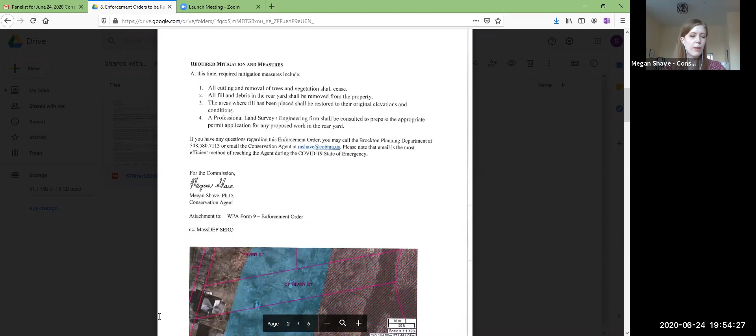All right, and you're looking for a ratification. Do I have a motion to ratify the enforcement order for 57 River Street? I'll make a motion to ratify the enforcement order for 57 River Street. Do I have a second?

I second. All in favor? Danielson, aye. Joanne, aye. Stephanie, aye. Okay.

And then the second new enforcement order is for 34 Herman Street. We had originally issued a letter to this property back in January 2020 about dumping behind the house that may have been encroaching on the city-owned parcel that abuts it. We didn't have any follow-up on that, but in the months since, I was informed by Deputy Fire Chief Williams that there had been additional earth-moving activities behind 34 Herman Street. So either fill has been brought in or fill has been spread around. There was a report that possibly debris was being buried as part of these earth-moving activities. And it does appear that this fill has encroached past the property boundary onto the city-owned parcel. In addition, the limit of disturbance is within 25 feet of that intermittent stream that runs through the city-owned parcel. So again, I've issued an enforcement order with required mitigation to get the property boundary reassessed so that the fill can be brought off of the city-owned property and that any disturbance can be properly documented as part of a permitting process if the owner at 34 Herman Street is planning to do some sort of leveling out of his backyard or otherwise.